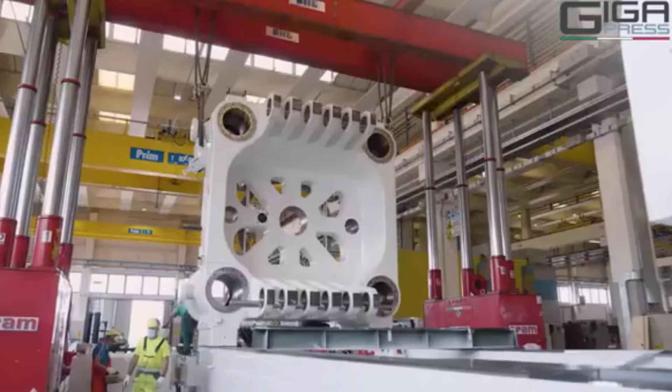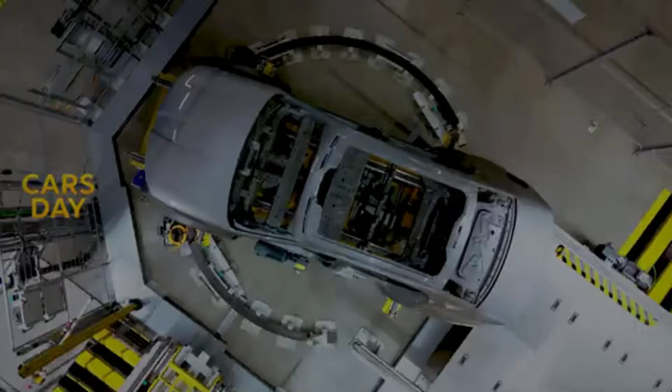Elon Musk isn't just talking about Cybercab production. He's confirming it with the colossal 50,000-ton Gigapress, a machine so revolutionary, it's forcing the entire automotive industry to either reinvent itself or face obsolescence. This isn't merely an equipment upgrade, it's a technological earthquake. So, how will the Gigapress fundamentally reshape automakers by 2027?

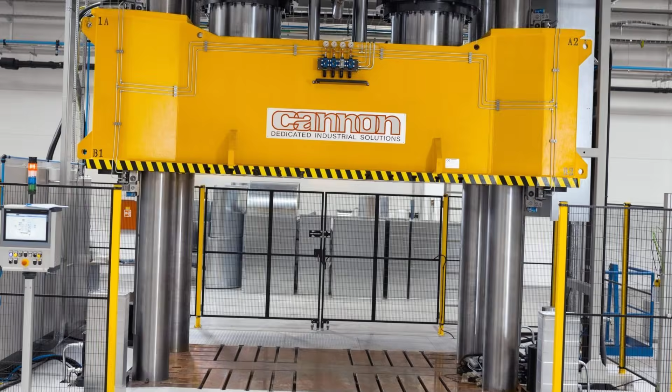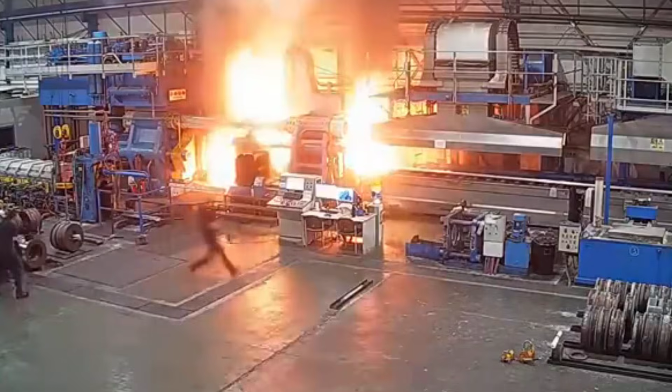To grasp the terrifying scale of this transformation, we must look beyond the 50,000-ton figure itself. It represents a clamping force of approximately 500,000 kilonewtons, an astounding 3 times more powerful than even today's most advanced 16,000-ton machines. This immense force allows the system to handle massive volumes of molten aluminum, filling extremely large and complex molds at lightning speed.

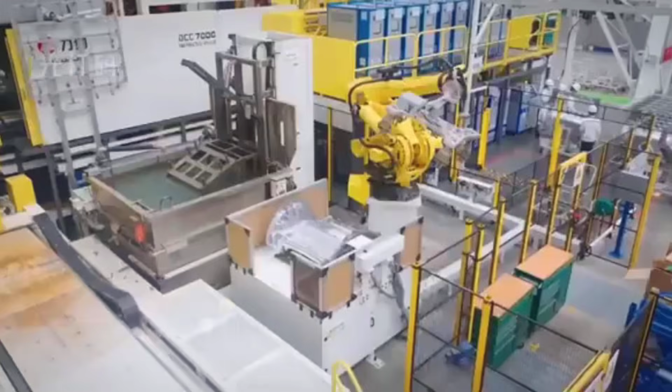While older machines struggle to inject around 80 kilograms of aluminum per cycle, the 50,000-ton Gigapress drives the process with overwhelming velocity, virtually eliminating the risk of premature solidification. At this colossal scale, greater size translates directly into absolute power. The truly terrifying impact lies in its disruptive productivity and the shrinking factory footprint it enables.

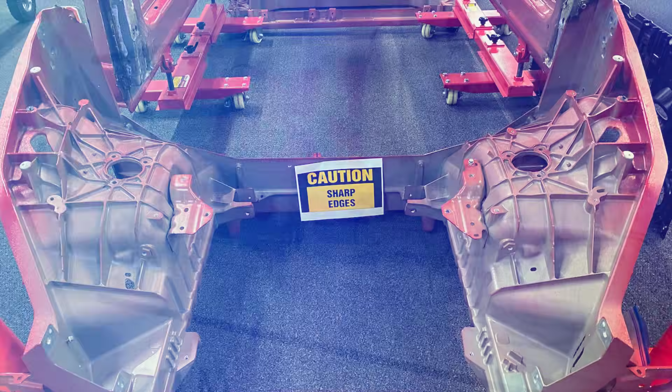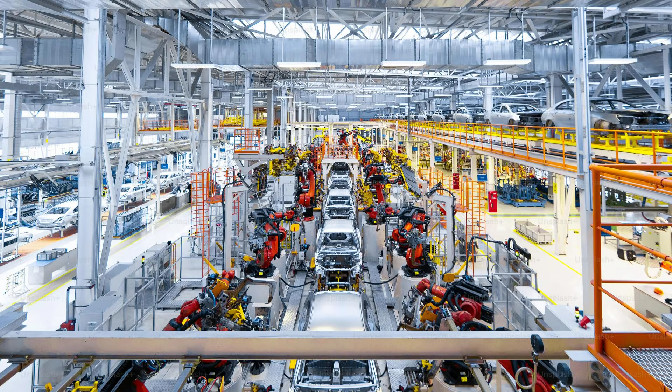Consider this. A conventional large casting machine produces just one structural component per cycle. The 50,000-ton Gigapress, by contrast, can produce up to 5 massive parts simultaneously, with each cycle lasting only 1 to 2 minutes. Thousands of large components can be produced daily without increasing operational complexity. More importantly, its effect on factory design is revolutionary.

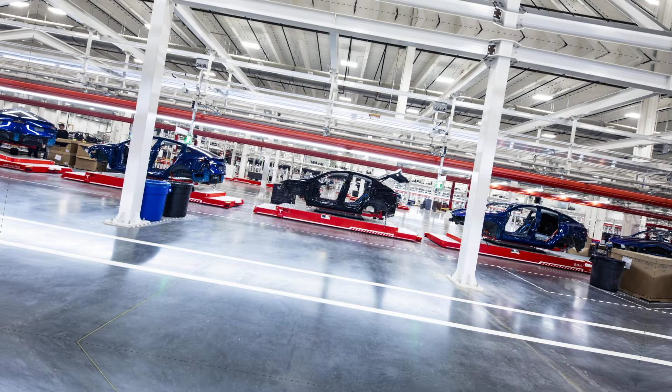Forget the traditional image of 70 to 100 stamped steel parts welded together by hundreds of robots. Tesla discards this entirely, replacing it with a single cast structure. The result is dramatic. Factory floor space is reduced by 30 to 40%. Labor costs plunge, and operations become astonishingly streamlined. Tesla isn't optimizing the old system. It is eliminating complexity at its root.

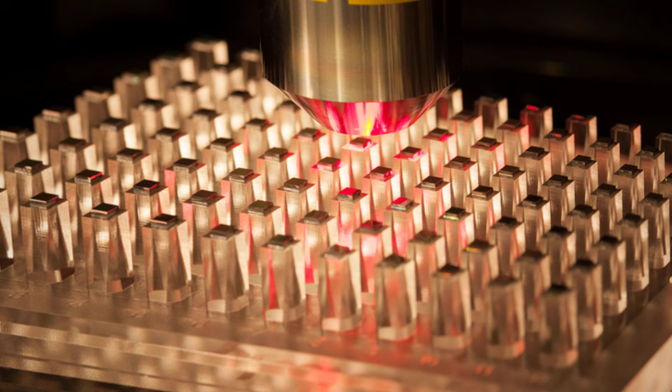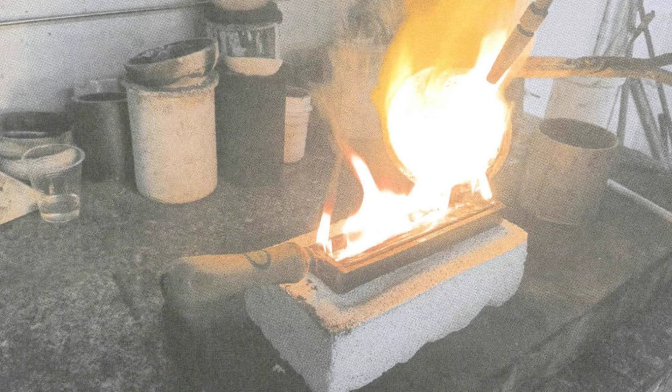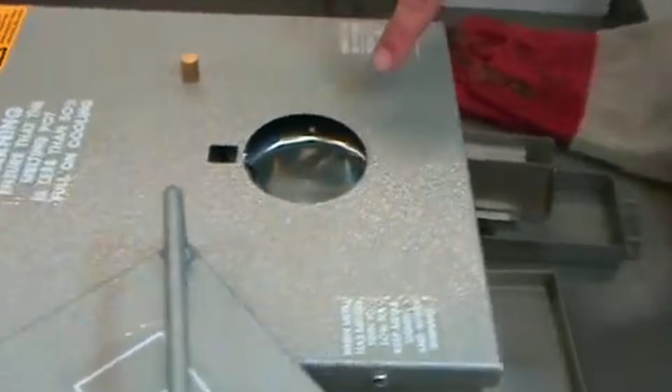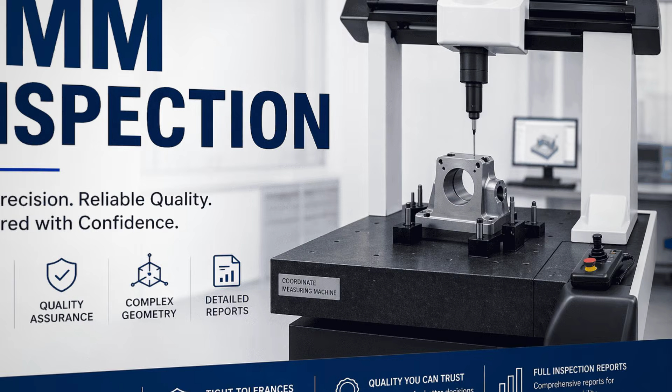Despite its colossal scale, the system operates with extreme precision, down to the micron level. Molten aluminum, at around 850 degrees Celsius, is purified to remove impurities larger than 25 microns, smaller than the width of a human hair. Immediately after injection, the casting undergoes thermal shock, rapidly cooling from about 400 degrees Celsius to 50 degrees Celsius to lock in superior material properties. At this level, speed may be king, but consistency is absolute tyranny. This becomes the ultimate weapon for delivering an electric vehicle priced below $30,000.

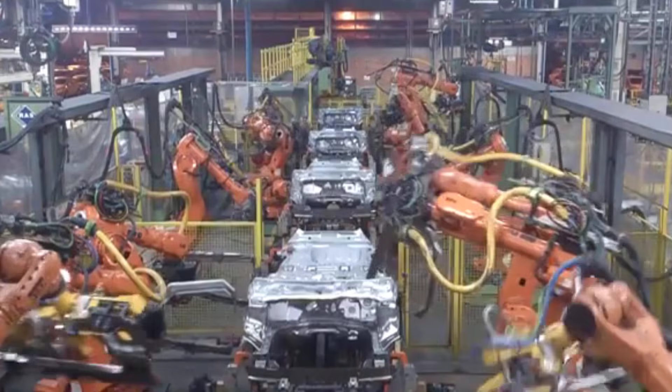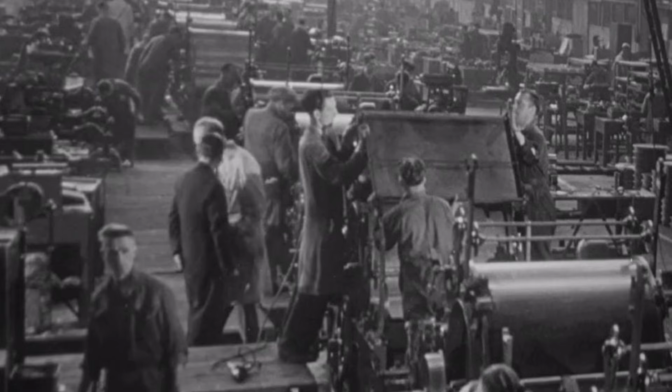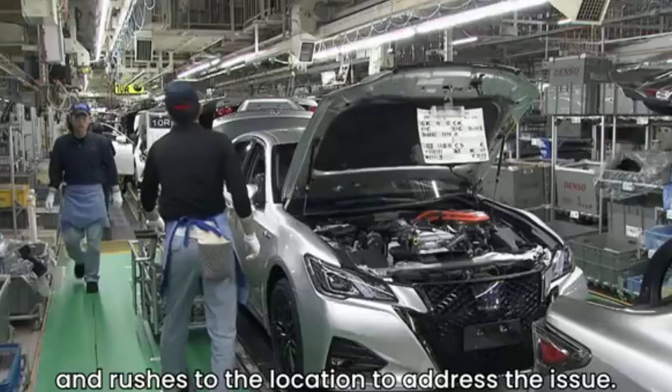From a historical perspective, the shockwave of the Gigapress is not just a technical milestone. It is an extinction-level event for legacy thinking, comparable to Henry Ford's assembly line or the lean manufacturing system pioneered by Toyota. However, there is a brutally important difference. While Ford and Toyota focused on improving efficiency, Tesla is eliminating entire processes. Elon Musk isn't taking shortcuts. He is demolishing the old road and building an entirely new empire.

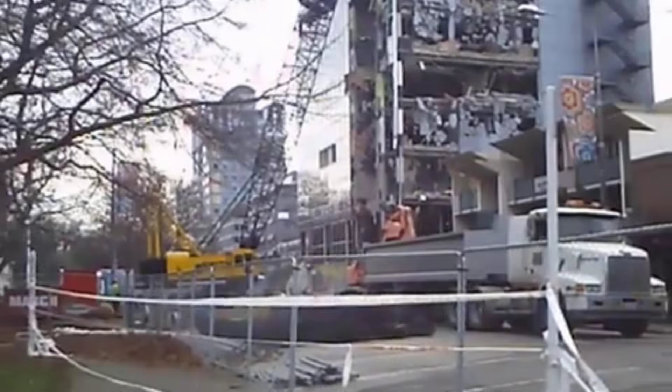Looking toward 2027, widely seen as a judgment year for survival in the EV era, automotive giants across the United States, Germany, and Europe are scrambling to adapt under immense pressure. The sheer force of the 50,000-ton machine exposes the fatal weaknesses of traditional manufacturing systems, forcing even the most established players to search desperately for lifelines in a battlefield where the rules have already changed.

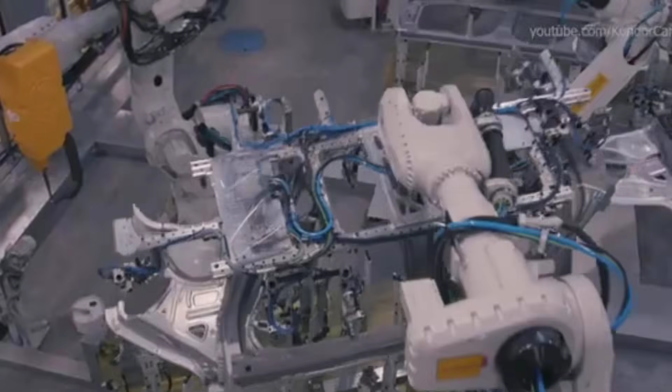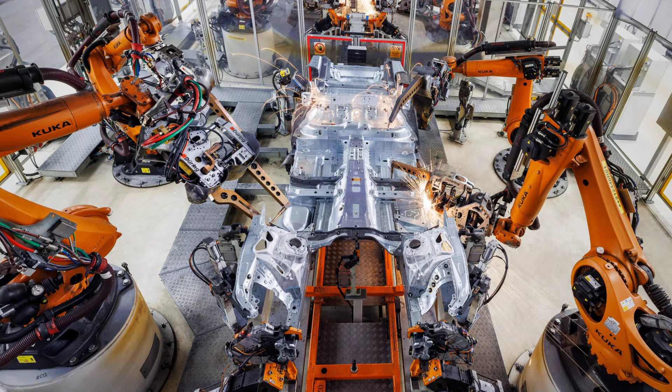In Europe, transformation is cautious. Volvo adopts a safer approach, gradually implementing 9,000-ton systems combined with modular design to avoid catastrophic production risks. Meanwhile, German automakers, long proud of their precision engineering, are increasingly unsettled by the rise of gigacasting across the Atlantic. Even on home ground, Ford Motor Company and General Motors are pouring billions into casting facilities to avoid being pushed out of the market by 2027.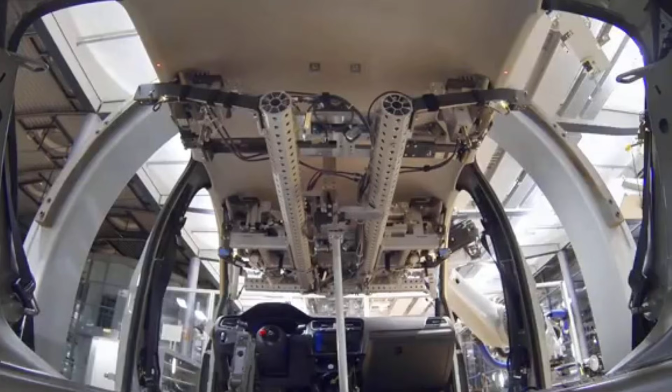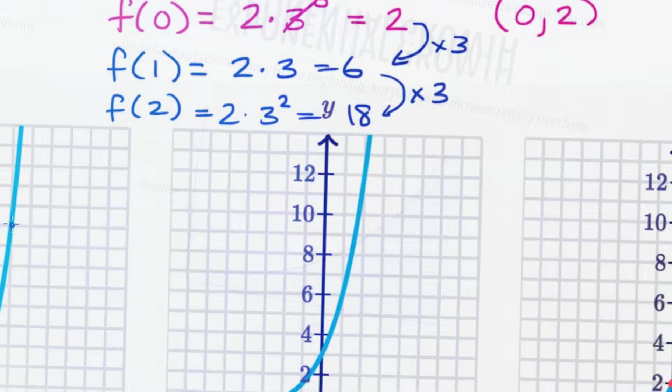Yet, the real tragedy of this race lies in a fundamental misalignment of mindset. While traditional automakers across the US, Europe, and Asia are rushing to adopt gigacasting as a patchwork solution to survive beyond 2027, Tesla has built an entire manufacturing philosophy around it. At the scale of a 50,000-ton beast, the difference is no longer measured in marginal efficiency gains. It expands exponentially. Every effort to catch up, whether fueled by German engineering discipline or American capital, risks becoming merely a backdrop to a massive industrial upheaval that Tesla has already set in motion.

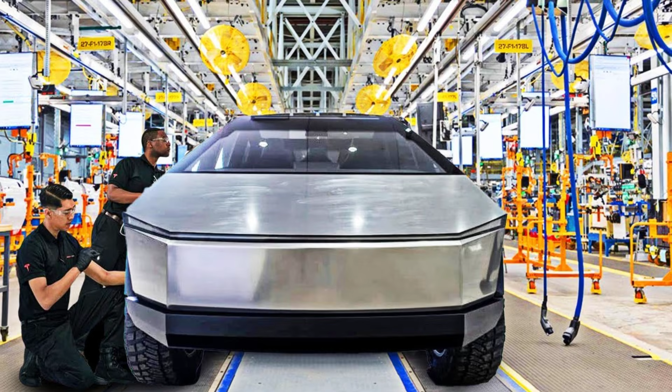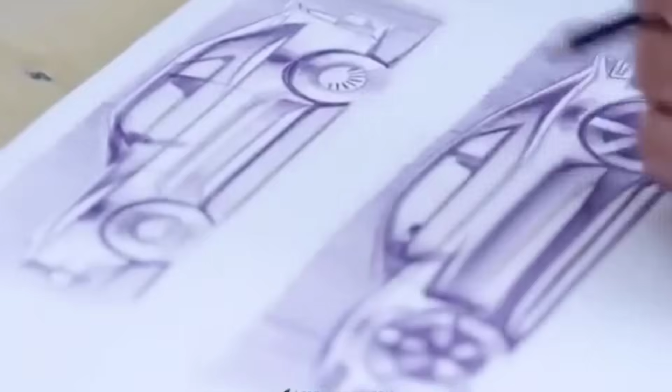Why are Cybercab and Model 2 the only vehicles that can fully leverage a 50,000-ton Gigapress? The reason these two vehicles stand out as the only true candidates for ultra-large-scale casting using a 50,000-ton Gigapress lies in one fundamental principle. This level of manufacturing is not an incremental upgrade. It is a technological coup that requires a complete redesign of the vehicle from the ground up.

Legacy models simply cannot adapt to this casting-first philosophy without compromising efficiency, cost, or structural integrity. Only vehicles specifically engineered around the physics of gigacasting and the unboxed production system can fully unlock this potential. For Cybercab, the logic is even more extreme. As a robotaxi designed for autonomous operation without a steering wheel or pedals, it is liberated from the constraints of traditional vehicle architecture.

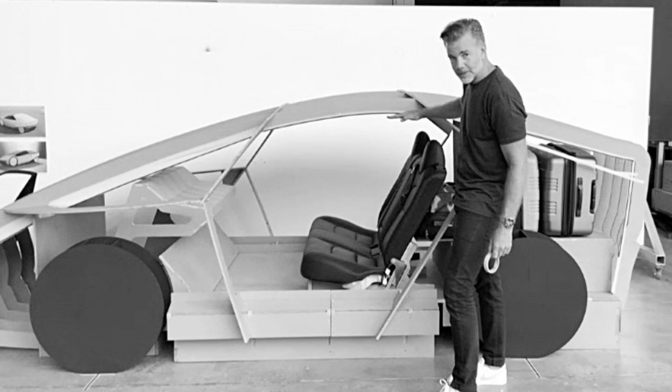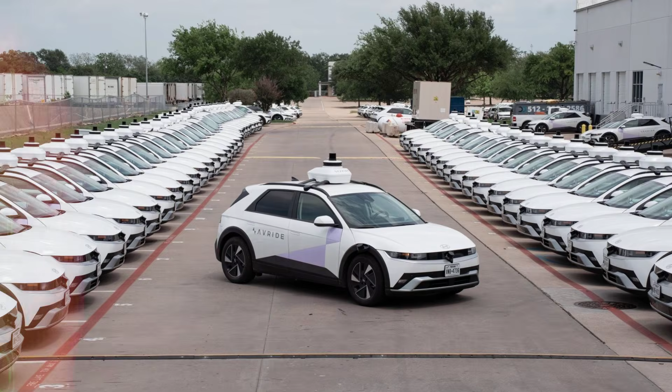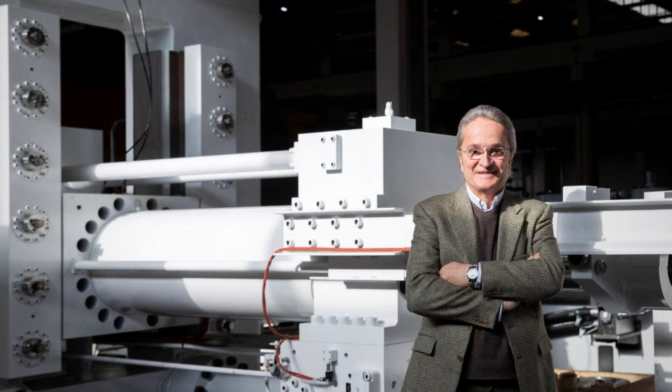This allows Tesla to rethink the entire structure as a single-purpose machine, optimized for durability, uptime, and cost per kilometer. A vehicle operating 24 hours per day, 7 days per week in a fleet environment must withstand usage cycles significantly higher than a privately owned car. That requirement directly dictates the need for a highly rigid, low-failure structural design, which is where the 500,000 kilonewtons of clamping force from a 50,000-ton Gigapress becomes critical.

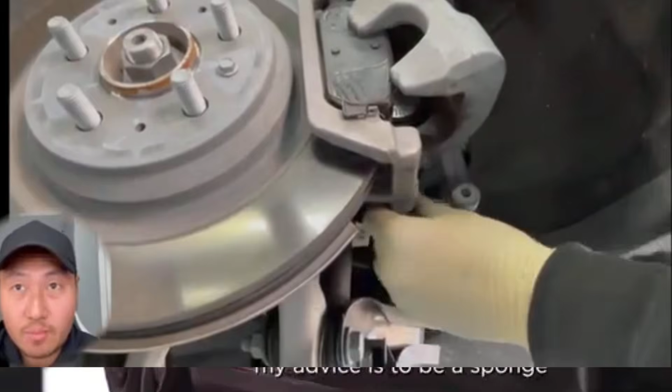By casting the majority of the Cybercab's body structure as a single, massive unit, Tesla can eliminate hundreds of joints, weld points, and failure-prone interfaces. Fewer parts mean fewer mechanical weak points, lower maintenance requirements, and faster repair cycles. From a production standpoint, this enables a radical scaling model.

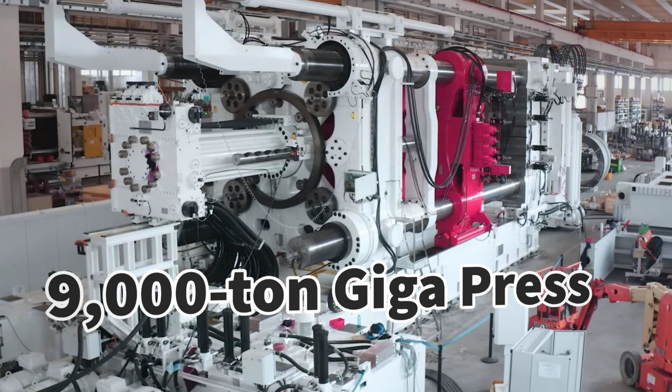Instead of assembling a vehicle through thousands of sequential steps, the core structure is formed in a handful of high-speed casting cycles. This is essential for Tesla's target of producing Cybercab at millions of units annually to build a globally viable robotaxi network. In this context, the 50,000-ton press is not just a tool. It is the prerequisite for autonomous mobility at scale.

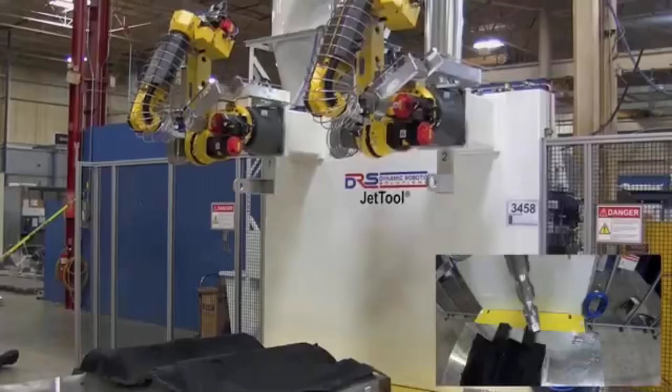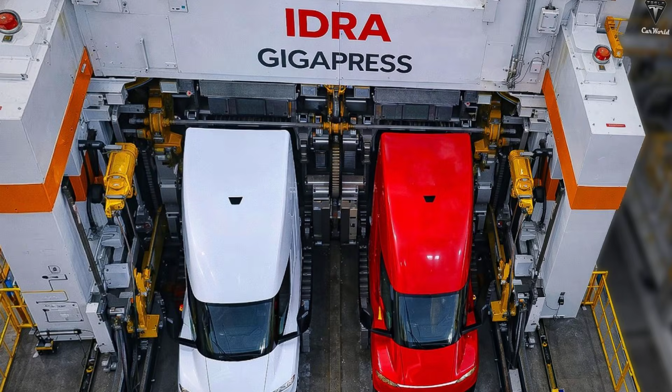Model 2, on the other hand, represents a different but equally critical challenge: price. With a target below $25,000, Tesla is entering the most cutthroat segment of the global market, facing low-cost giants like BYD. At this price point, traditional manufacturing methods simply cannot deliver acceptable margins. Every component, every process step, and every second of production time must be vaporized. This is where the 50,000-ton Gigapress and the unboxed process converge.

By casting multiple structural sections in far fewer steps, potentially casting 5 chassis simultaneously, Tesla can reduce factory footprint by 40%, labor requirements by 25%, and total production time to a staggering 5 seconds per cycle. Industry estimates suggest this system could slash manufacturing costs by up to 50% compared to conventional assembly lines. Replacing hundreds of parts with a few large castings eliminates not only material costs but also the logistics nightmare of a sprawling supply chain. The result is a fundamentally different cost structure.

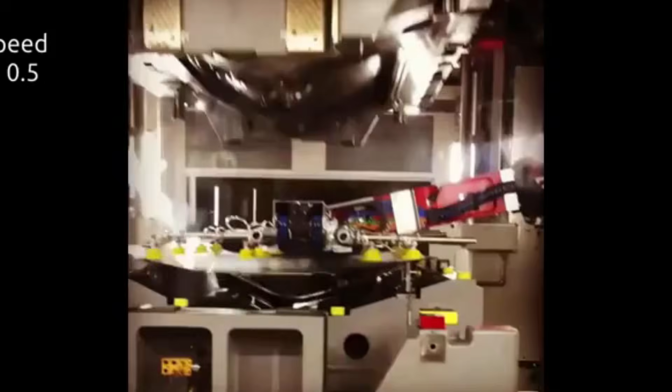Model 2 is not just a cheaper car. It is a vehicle designed to be printed by a system that removes thousands of components and kilometers of assembly lines. This is how Tesla can realistically deliver an EV that is price competitive with, or even cheaper than, internal combustion vehicles. Without gigacasting at this 50,000-ton scale, such a target would be a mathematical impossibility. However, this cost challenge does not exist in isolation. It is being defined by an already brutal battlefield dominated by ultra-low-cost EV manufacturers.

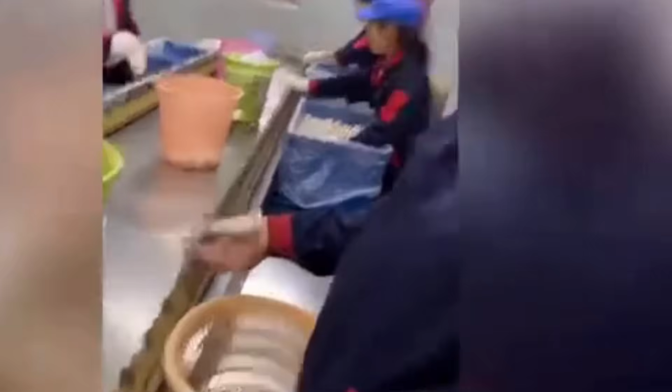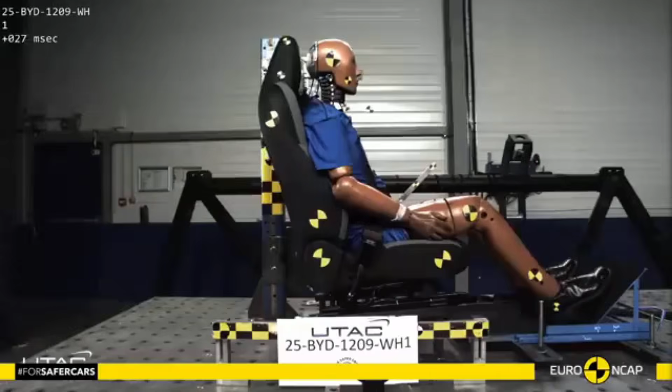To further highlight the intensity of this transformation, it is impossible to ignore the brutal competition in the low-cost vehicle segment, where companies like BYD, SAIC Motor, and Wuling Motors have mastered highly efficient, large-scale production of affordable electric vehicles. These manufacturers rely on a different strategy: maximum localization of the supply chain, low labor costs, and modular vehicle architectures that prioritize cost reduction over structural integration. Models like the Wuling Hongguang Mini EV demonstrate how far costs can be pushed down using conventional stamped parts and simple assembly. But they also reveal the limitations of this approach in terms of durability, scalability, and long-term efficiency.

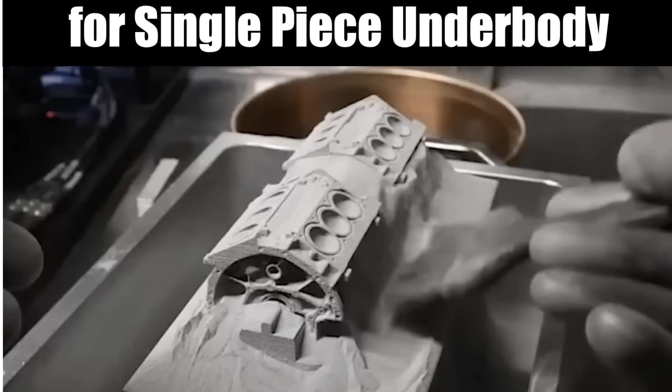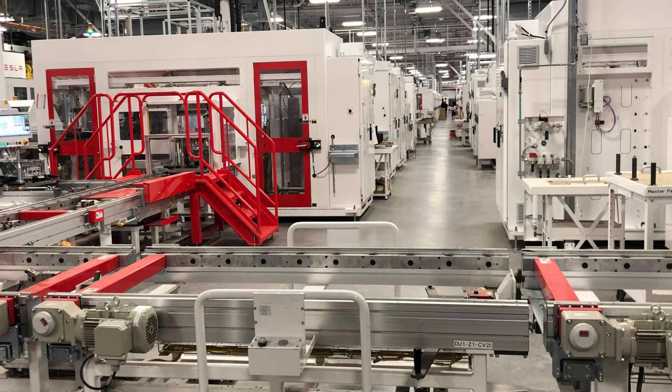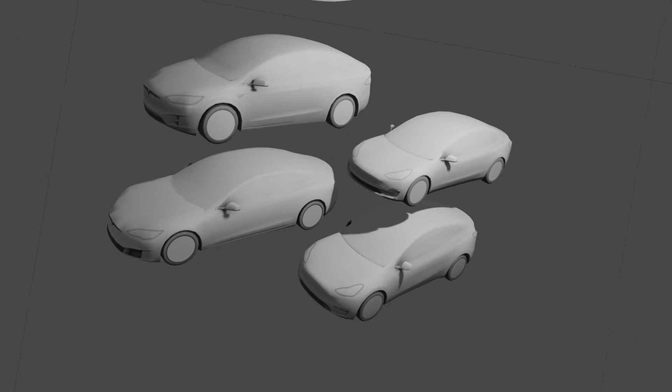This is where Tesla's strategy fundamentally diverges. Instead of optimizing fragmented production, Tesla is attempting to eliminate fragmentation entirely. While Chinese automakers reduce costs by compressing margins and scaling labor-intensive processes, Tesla reduces costs by removing those processes altogether. The difference is profound. One approach fights for efficiency within the system, while the other rewrites the system entirely. With the 50,000-ton Gigapress, Tesla is not just competing on price, it is attacking the core cost structure, aiming to produce vehicles with fewer parts, fewer steps, and dramatically lower complexity.

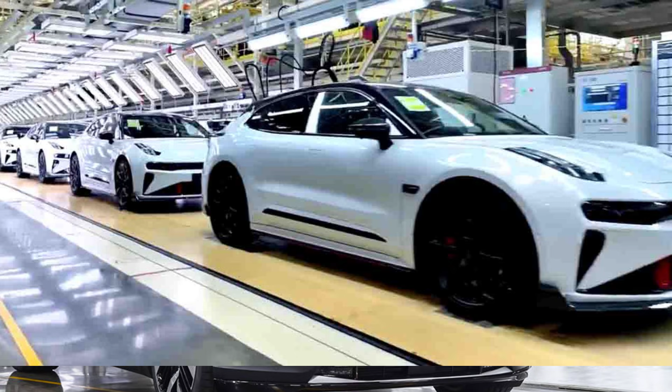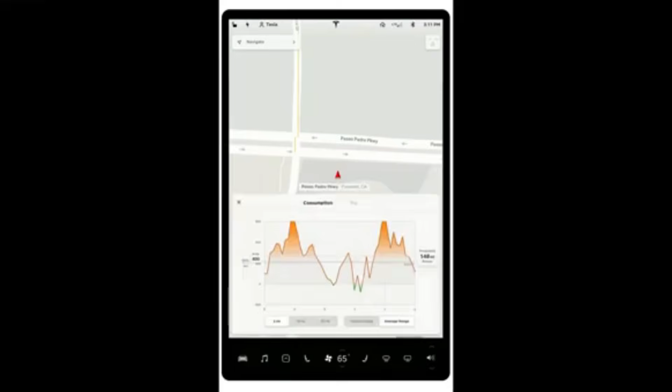For Model 2, this becomes a direct confrontation. Competing against vehicles priced between $10,000 and $20,000 requires more than incremental cost savings. It demands a manufacturing breakthrough. If Tesla can truly achieve large-scale structural casting, combined with the unboxed process, it could close the cost gap with Chinese EVs while still delivering superior structural rigidity, safety, and software integration. In other words, Tesla is attempting to bring premium engineering into a price segment that has traditionally been defined by compromise.

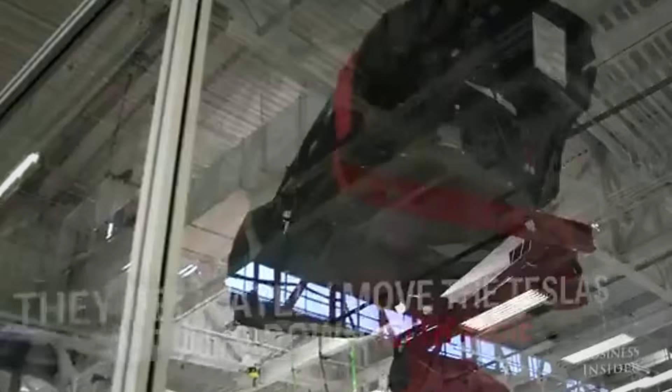At the same time, Cybercab introduces a new dimension of competition, not against traditional car ownership, but against cost per kilometer. In a world where autonomous robotaxis operate continuously, the economic shift moves from upfront purchase price to lifetime operating cost. Here, Tesla's manufacturing advantage becomes even more powerful. A vehicle that is cheaper to produce, more durable, and easier to maintain directly translates into a lower cost per kilometer than any human-driven alternative. This puts pressure not only on automakers but also on ride-hailing platforms and urban transportation systems.

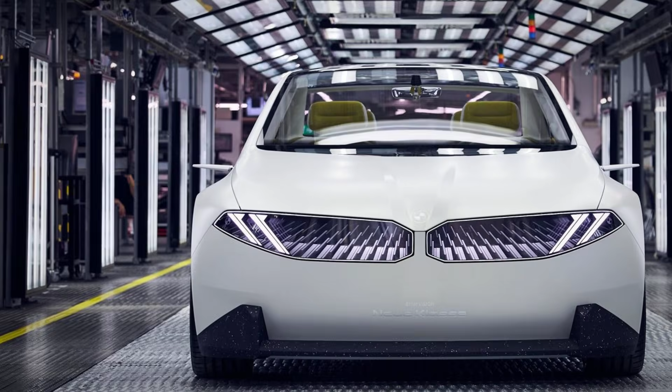Overall, the emergence of ultra-low-cost EVs from China and Tesla's breakthrough large-scale manufacturing strategy sets the stage for a two-front war: one focused on cost minimization through scale and labor efficiency, and the other driven by technological disruption and manufacturing simplification. By 2027, the winner will not simply be the company that builds the cheapest car, but the one that redefines how cars are built from the ground up.

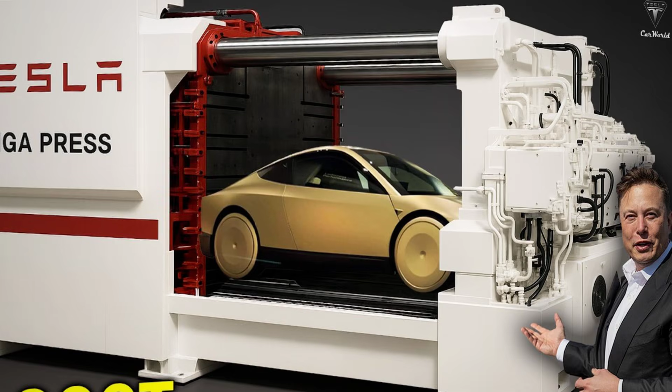Ultimately, both Cybercab and Model 2 share a common mandate. They must be produced at extreme scale with radically lower cost per unit. While Cybercab optimizes for utilization and durability in a fleet model, Model 2 optimizes for affordability and mass adoption. The 50,000-ton Giga Press is the only technology capable of supporting both objectives. This is why these two vehicles are not just new products, they are manufacturing platforms. By building them around gigacasting from the first atom, Elon Musk is effectively redefining the automobile not just in design, but in how it is forged, scaled, and deployed globally by 2027.